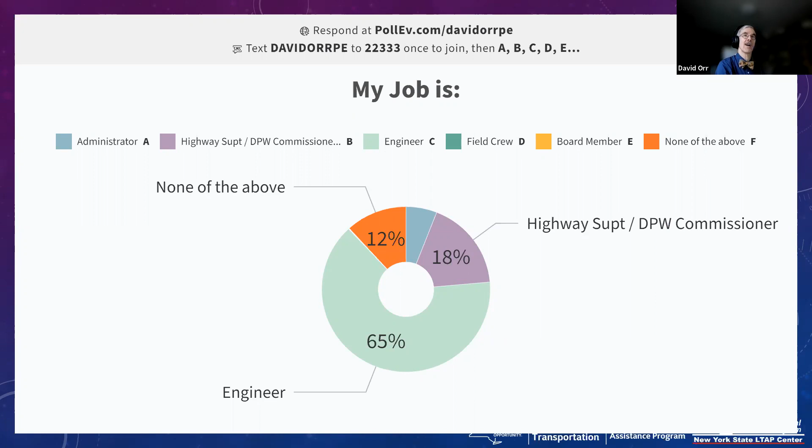Okay, so that's a good sense. We got folks from outside New York, we got all over New York State. And again, I invite your friends, get more of them involved, because this is a series we hope to really evolve, and we hope you have fun with it.

Now, these series of webinars—and we've been playing with the name, if you got a really good name, let us know—we've called them fundamental webinars. I sort of call them, in short phrase, why webinars. We're going to focus on why we do things.

But really, it's a series. We're going to cover over time all the different topics you need to manage, maintain, and engineer your highway system, whether it's a street system or a road system in a rural area—really whatever you've got.

Okay, now the rest of this year we've already got scheduled out—actually we have into the spring as well. You can just go on our website and search for it. And who, what, and why webinars, I see that—that's actually not a bad idea.

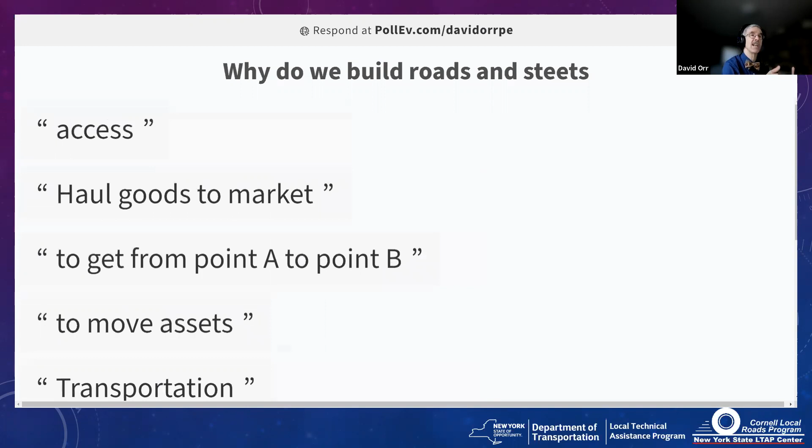Transportation, to move assets, okay, to get from point A to point B, and then haul goods to market. In fact, that's the first federal highway bill in 1916, was to get the farmer out of the mud, the farm to market roads, and the concept of getting our goods to market, because they would rot before you could get them to be sold and eaten by people.

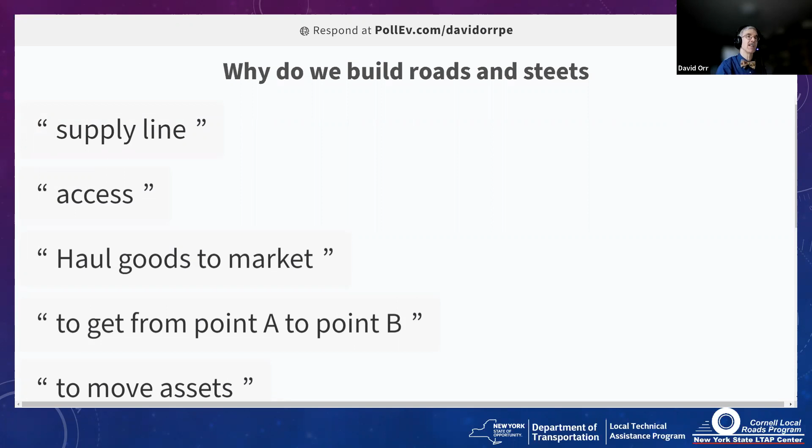So yeah, all good reasons why we build roads. But let's talk a little bit about why we build roads and the engineering and the science behind them, and see if that changes our answer a little bit. So what I'm going to do is talk about the three things that are the whys that came up when I was putting this together: traffic, the structure, why is there a structure, and the geometry.

And of course, it all really comes back to our families, and all of us live on a local road. We start from home, we go to work or school or some event, and we come back to home. And home is really the beginning and ending of most of our trips and our days.

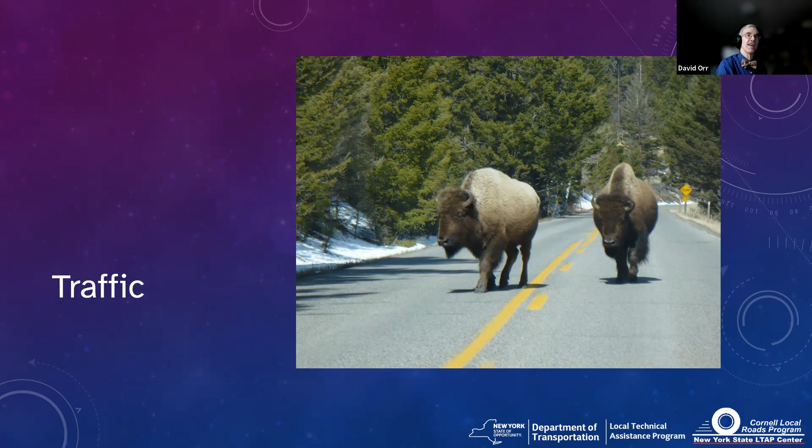So let's talk about traffic to start with. Now, this is in Yellowstone National Park. It's a little bit unique traffic, but we have to think about the traffic that's using our roadway. So again, in our poll, who uses your roads and streets? What kind of vehicles, or what would you describe? What one word would you use to describe the user of your roads and streets?

You've got commuters, yeah, people going from home to work. You've got bikers, you've got all those different people. You've got motorized traffic, okay. You've got trucks, okay, lots of citizens. Yeah, farmers. So far we got a pretty good list here, see if we get a couple more.

But if you think about it, that's really what we have to think about. The starting why is who's using the road. And the why then comes back to why we do what we do, which is to get them from point A to point B. Yeah, the military uses, especially some mainline roads might be needed. Electric vehicles down the roadway. I don't see any pedestrians, but think about it.

Pedestrians are probably on that list, right? Buses are probably on that list, both city buses or intercity buses, even though they go in rural areas, school buses, intra-city buses. So those are things you have to think about. Different kinds of trucks, small trucks, single axles, dual axles, semi-tractors. All kinds of different vehicles are using our roadways.

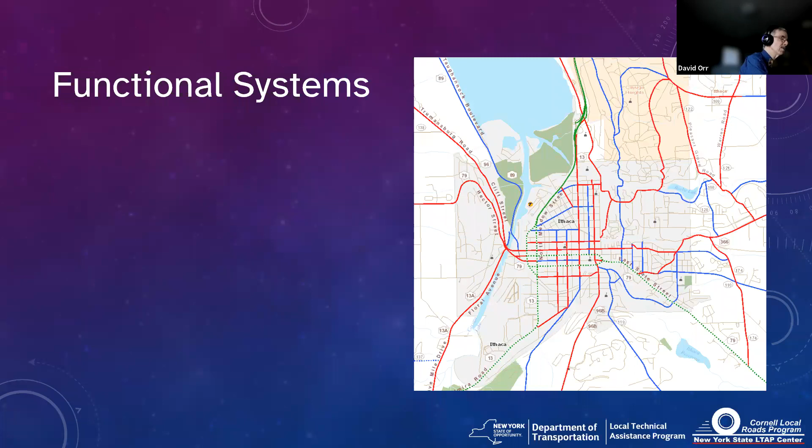The federal government has a list of functional systems. You can go on the web and search for functional classification, New York State DOT or NYSDOT, and you'll get a list of the different functional classifications defined by the government. The link is really long, so my advice is just search for functional, NYSDOT. Just search on the web for that.

It's much faster than trying to copy the link. If I come back over here to the web and type NYSDOT functional class, you can see Google suggests it, and right there, functional classification maps, New York State DOT pops right up. You can get a sense and look at the functional classification on your roadways, and there's actually an interactive viewer you can use.

That, in fact, is where this map comes from. You may want to do that for your own community and look, because there are times when you'll find roads that are mislabeled for whatever reason. It changes some federal dollars you can get—if it's an arterial roadway, for instance, you can get some extra dollars. However, you then have to meet higher levels of standards.

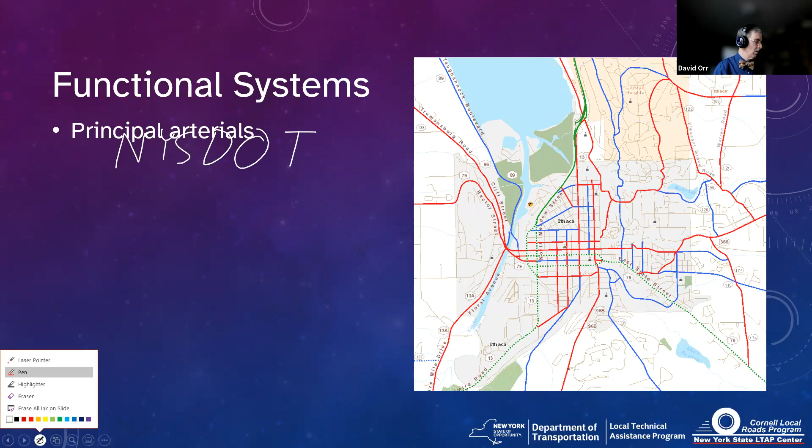We have arterials, the green ones on the line, maintained by the state. Route 13 going through the city of Ithaca is a principal arterial. Route 79 coming in from the east is a principal arterial. These are the national highway system, really important highways, typically maintained by the state, even within the city. We have other arterials, called minor by the federal government, but they're pretty darn important to a particular community—the main arteries of the system, hence the name.

Collectors collect the traffic and bring it to the arterials. In this particular case, the arterial system here is in red—sorry, my fault—the collectors are blue in this case. And then the local roads beyond that. They collect traffic, we could debate about that.

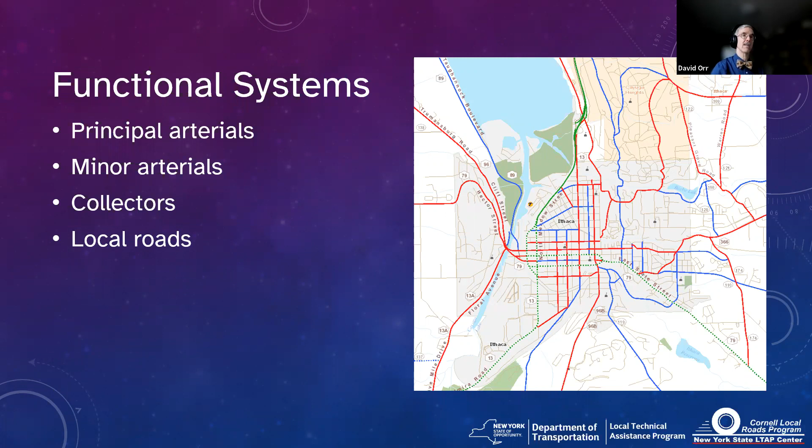The reality is one of the challenges we run into is if you live on a roadway, you treat it as a local road. If you know anything about Ithaca, there's a road down here on the bottom right, Pine Tree Road. It's the main road to get from a state highway over to Cornell University, but there's a whole bunch of houses on it. And so we always have that conflict—we can get a road that's both an arterial, a collector, or a collector and a local, or sometimes all three. So when we're thinking about why we build a roadway, we're thinking about that traffic, but sometimes there's a conflict that occurs.

Now, the American Association of State Highway and Transportation Officials, AASHTO, has actually got another designation you might want to look at for road standards, and that is very low volume roadways—these are roads under 400 vehicles per day. They're a little bit lower in terms of design standards, but it turns out they still meet the needs of the users. And again, why do we want to build a road bigger than it needs to be?

This actually comes from an idea developed here in New York State back during the Mario Cuomo administration, the idea of developing standards to meet the traveling needs and the needs of the people who live along that roadway. It's now a national standard for very low volume roads, but you've got to be under 400 vehicles a day.

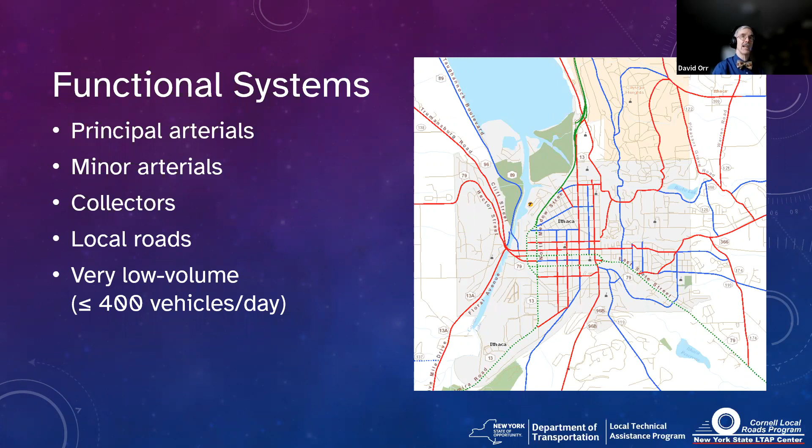So let's take a little side diversion and talk about how we might estimate traffic. Most of the time in these webinars we're talking about foundational concepts, but we'll throw out some nuts and bolts that might help you here and there. So let's estimate some traffic.

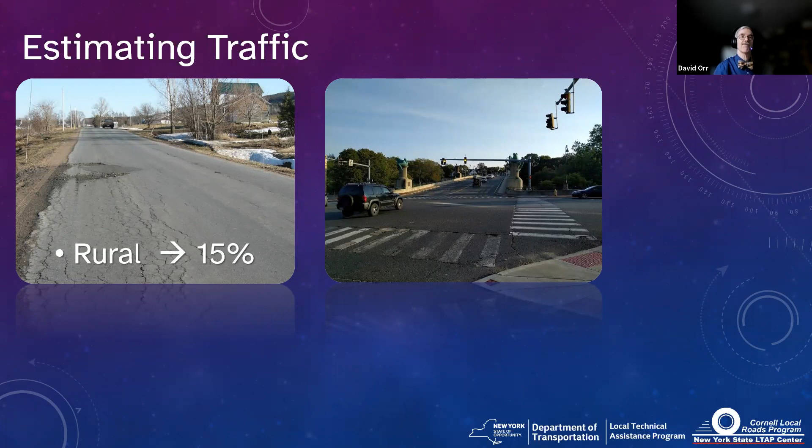Turns out that the busiest time of day, which most of you know, you can come in here and look at the busiest time. In a rural area, the busiest hour is about 15% of the traffic. In an urban area, like the city of Ithaca or city of Auburn, the busiest time is about 11% of the traffic.

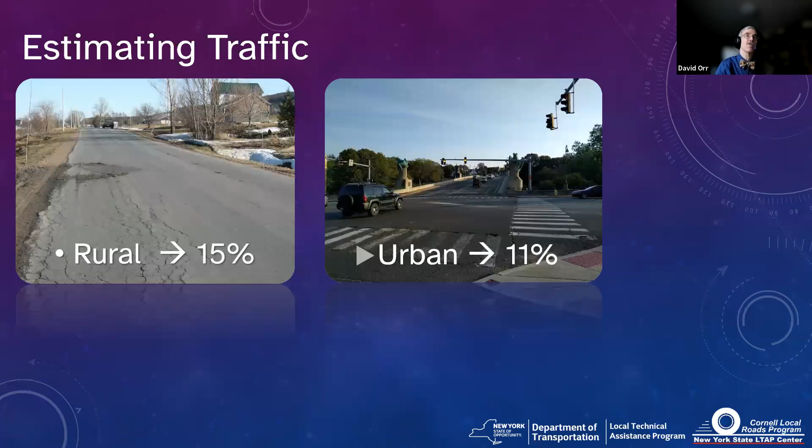It's not spread out evenly over the whole day, and this is because of what we talked about with traffic earlier with the commuters. So if I want to get a quick estimate of traffic, all I've got to do is know the busiest time, go out there, and count for 15 minutes.

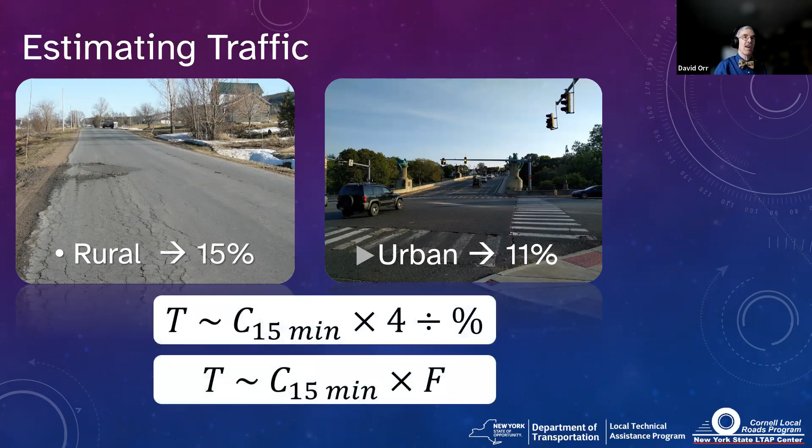Then I can calculate the traffic for the entire day by multiplying by 4 to get a 1-hour count, and then dividing by that percentage, either 15% or 11%, depending where I am. If I'm a suburban community, somewhere in the middle. You could also just use a multiplying factor — if you do the calculation, the factors are 27 for rural and 36 for urban. It's a pretty simple calculation.

Just to illustrate that, let's say I go out there in a rural area and I count exactly 15 vehicles in 15 minutes. So 15 vehicles in 15 minutes is 15 times 4, and that gives me 60. Then I divide that by 15%, and that equals 400.

It turns out that if you're in a rural area and you count about 1 vehicle a minute going by you during the morning rush or the afternoon when people are coming home, that's 400 vehicles per day. So there's your line where you can say it's a very low volume road and you might be able to use a little bit less stringent standard, which is sort of nice.

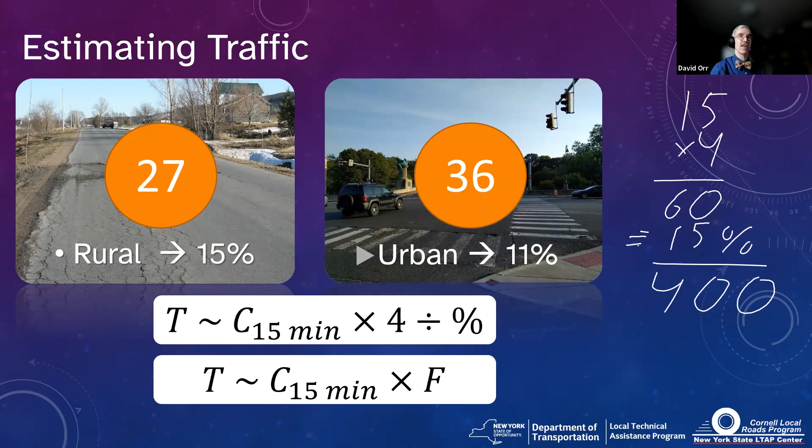And you can still use that same standard in an urban area — the calculations are just slightly different. So if you think about it from the standpoint of overall traffic, the principal arterial system is only 5 to 10% of our entire system — the interstates, the main state highways.

But it carries anywhere from 40 to 65% of the traffic volume, depending where you are, both in the state and within the country. On the other hand, the local road system only carries about 10 to 30% of the total volume, but it's 65 to 80% of the traffic length. Again, that's where most of us live, and we start and end our trips. So it's important to have the right standards to match the roadway needs and the traffic.

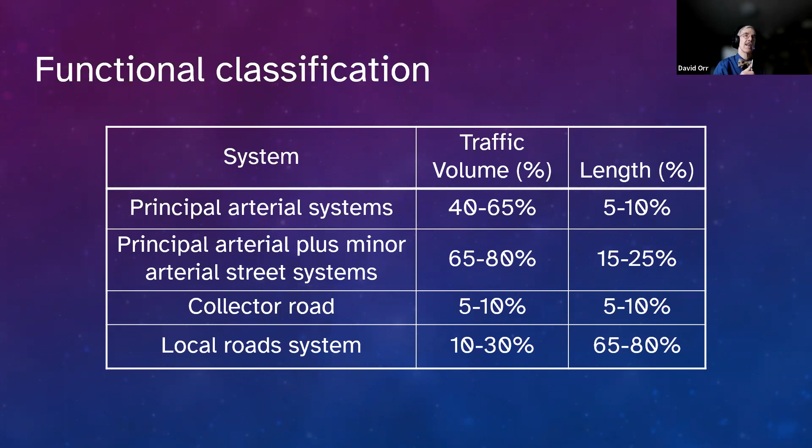Just to illustrate this, let's talk about goods transported by truck. I'm not going to put a poll up for this one, so just throw into either the chat or the Q&A your answer. What percentage of goods are transported by truck in the United States? That includes all goods, by the way, including gasoline, kerosene, things that might go by pipeline — so everything. You've got trains, trucks, pipelines, you've even got wires. Some people put those goods in there, but let's not worry about that. What do you think? What percentage?

We got 65, 6, 80 — all kinds of different answers. It turns out you can go on the web and search, you'll get a slight range, but it's amazingly consistent. Now, these are pre-COVID numbers; COVID may change that some, just so you know. But the range in the United States is between about 68 and 72%, depending on who you believe. I went with the Bureau of Transportation Statistics, and they use 69.1%. I'm just going to round that to 70%. So 70% of our goods get transported by truck at some point during their time.

So from a traffic standpoint, trucks are pretty important and one of the main reasons we build roads and streets. As an exercise, you may want to take your own community and look at it, and then think: what are my functional classifications? What are the important roadways? What are the arterials? What are the collectors? What are the locals?

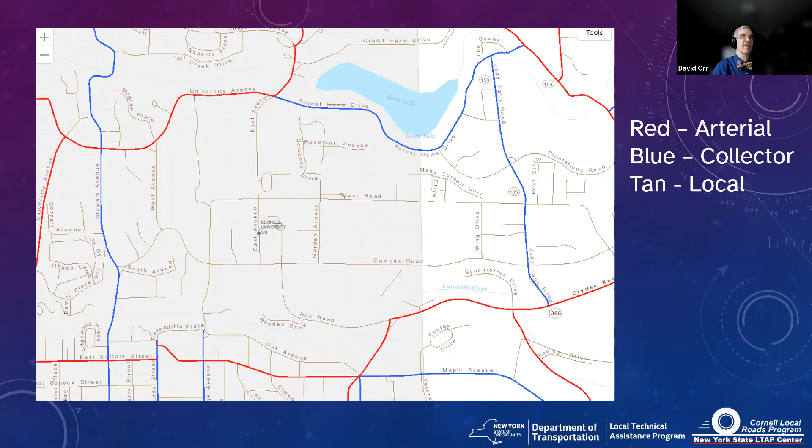So even within a local system, you may have roads that are more important. So keep that in mind as we think about the why. Now let's talk about structure. We know why we need to build roads to move things from point A to point B, but let's talk about the structure. Why do we build pavements?

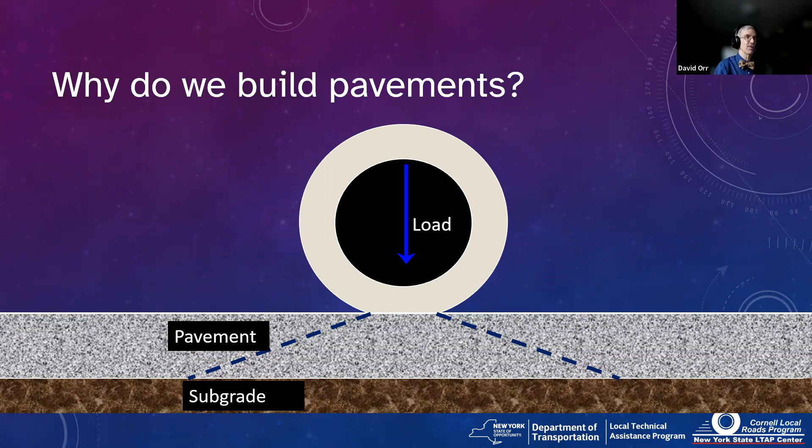Well, the original idea behind building pavements was we didn't want to overstress the native material, i.e. the subgrade. After we strip off all the organics, we're left with the subgrade material, which in New York State is probably glacial till. Some places we get sand, some places rock, but glacial till is our most common material. We don't want to overstress the subgrade. And that was the idea.

But turns out, as we've learned more and more, when it comes to the structure, what we really have to focus on is not overstressing the subgrade, but fatigue. Not exactly the same fatigue that we see with paper clips when you bend it back and forth because you're waiting on the phone, but similar to fatigue of a paper clip.

And to illustrate this, I'll show you part of a video. Let's get the arrow going here. And here comes our video. Watch the two green dots that exist here.

You can actually see the pavement move under the load of these trucks. Now, these are fully loaded trucks without drivers. This is early technology - they did lose a couple. They were testing a road to see if it would fail. It has poor drainage, as you can tell, very thin layers of asphalt. This was done by the U.S. Forest Service to see.

And what it turns out is we've learned all this: pavements don't fail like a paperclip due to stress. They fail due to strain, how much bending goes on. The more bending, the faster they fail. So when it comes to structure, we care a lot about the strain or the bending amount. So the why of a structure is to keep it from bending so much. This particular one only took 81 passes and this road completely failed. Wouldn't make for a good roadway.

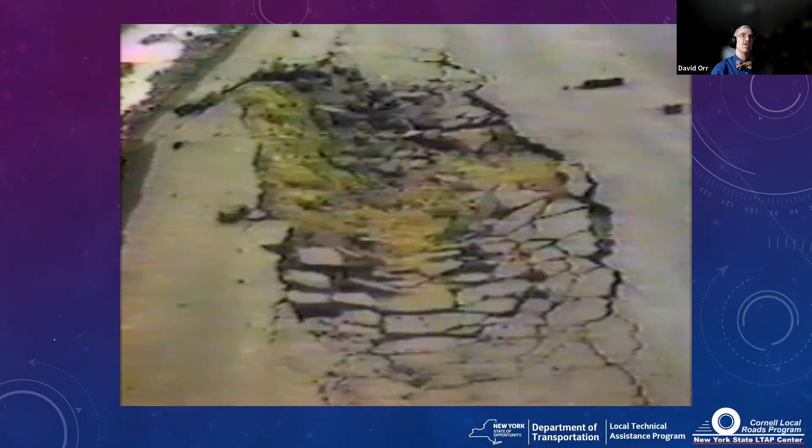Good research project, not good road. But it turns out strains are the things we care about. And the more bending, the faster the road's going to break down. So obviously in this particular case, we want to have good drainage because we don't want that water to get in the way. We don't want that water to create problems for us. And so that's an issue we need to think about.

So the locations of the critical strains - well, obviously there's a point right under the wheel that we care about. Let me get a color that we can see here. Let me get yellow. How about yellow? So we want to care right under the wheel. There can be strain due to that.

There's also a bending strain point here that might be near where the pavement bends under the load. There's also a point at the bottom of the asphalt where there's tension going on. It could be an issue for us. So that's something to be aware of.

We could have a point here on the top of the subgrade where there's strain, and that bending leads eventually to rutting. The point is, where the pavement bends is what we care about, and we want to reduce the amount of bending as much as possible. That's the goal here, as much as we can.

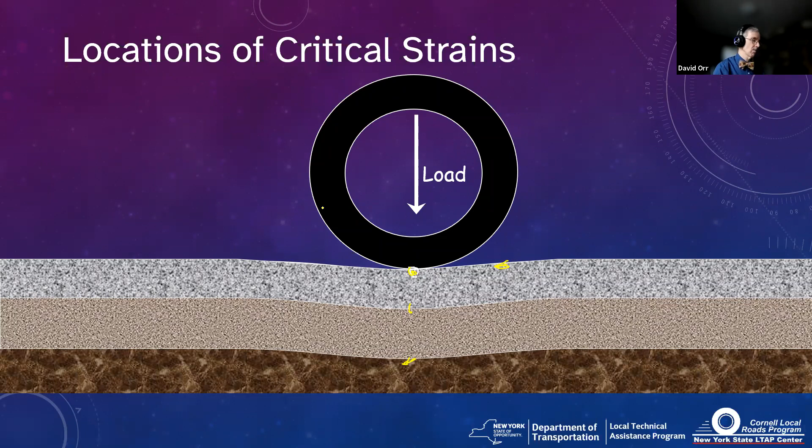Now, in terms of what that means to damage as we're building the structure of our roadway up, let's ask a simple question: the damage of trucks versus the damage of cars. How many passes by a car do you think it takes to do the same damage as one fully loaded 10-wheel dump truck? Throw that in the chat or the Q&A.

14? 1,000? Okay, somebody put in 200. Okay.

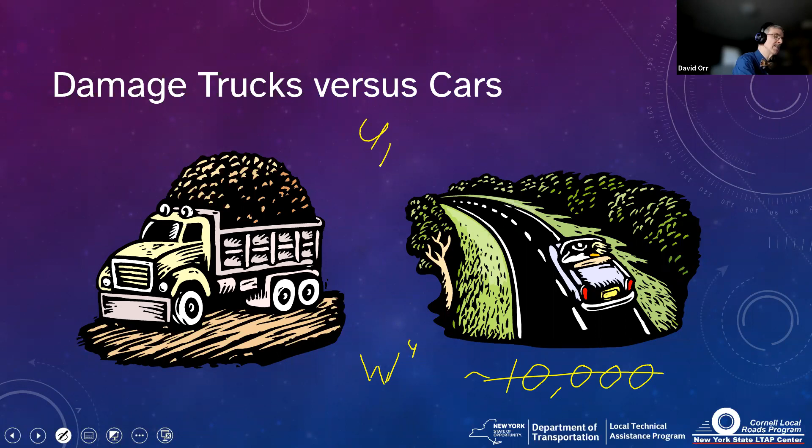300. So it turns out you can do the math, and the amount of damage done is related to the ratio of the weight—I'll use W for that ratio number—raised to the fourth power. It's not exactly 4, but close enough. So if the car weighs 3 tons and the truck weighs 30 tons, that ratio is 10, and 10 to the fourth power would be approximately 10,000. But that doesn't account for the fact that trucks have a lot more wheels, so 10,000 is the upper limit. Most people agree the ratio is somewhere between 4,000 and 6,000. So you need 4,000 to 6,000 cars going down the road to equal the damage of one truck.

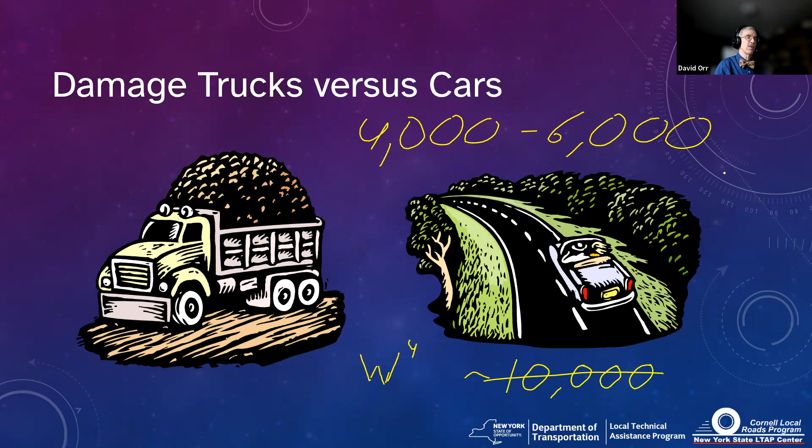So when it comes to structure and thickness, trucks rule. We design our roads to handle those heavy loads. And of course, that means we need to worry about seasonality, which is why we post some roads in the spring—because when it's thawing, there's more strain and faster failure. That's why we post it, to reduce damage on the roadway. So when you're managing your system, that's something you may want to think about.

Now, someone asked a question about posting. I know not everybody posts their roadways—we don't see it on the state highway system, but we certainly do it on the town system. You seasonally post roadways to reduce weights during the weakest time of year, the spring thaw period. In some parts of the country, they go the other direction: they allow extra weight in winter when the pavement is frozen, because it's actually stronger then. More importantly, it doesn't move as much—less strain, it lasts longer, less fatigue.

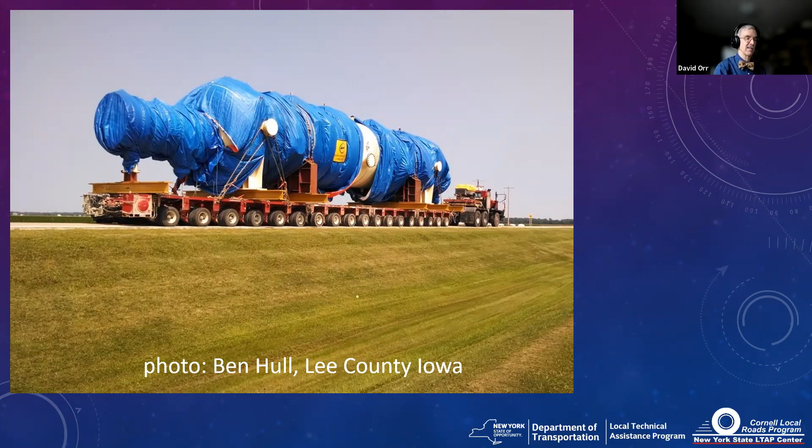Now, the surface material is a little bit of a different part of the equation. I just want you to keep that in mind—surface material is slightly different in terms of the equation we deal with. So keep that in mind as you're thinking things through.

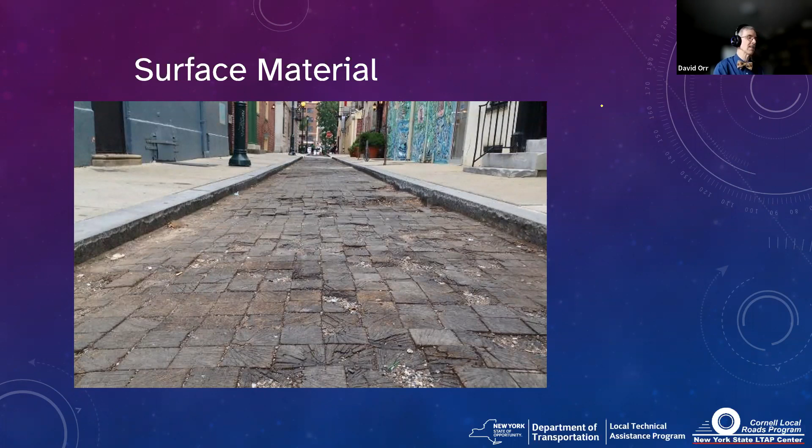The surface material is carrying the vehicle loads, yes, but more importantly, it's taking the abrasion from tires—high pressure tires, cars—so in this case, all traffic matters. Now, this is a wooden street in Philadelphia, if I remember correctly, and it's still maintained with wood. But what kind of material do you have on your road system? What surfaces do you have? I don't think anybody has wood that I know of—if you do, that'd be cool.

Asphalt is by far the most common in New York State—we have more asphalt surfaced roadways, sometimes called blacktop, than any other single surface. We sometimes use abbreviations like HMA. People use pavers—my driveway is pavers. You'll see cobblestone streets, gravel roadways, oil and stone. Some people have used cinders, which is still an unpaved surface. Concrete—those folks in Iowa have more concrete in their local system than any other single structure. So you can see all kinds of different surface materials.

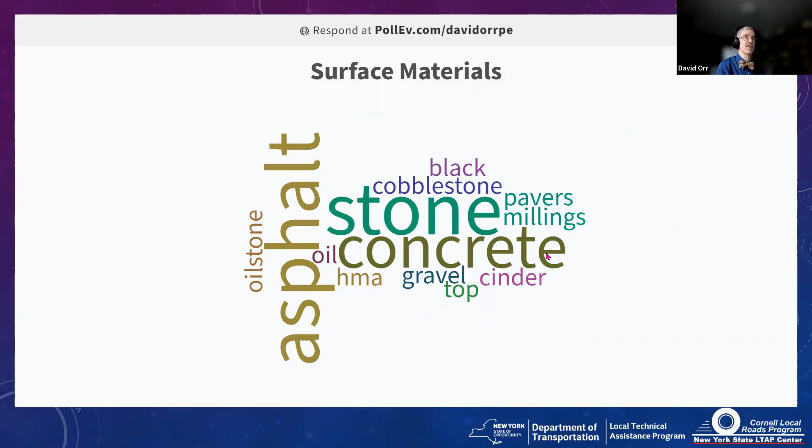Why do we choose these different surface materials? It's not really part of the structure—well, it is, but it's not the same failure mechanism. In this case, we're worried about abrasion, surface rutting. We want durability to hold up under traffic, and not polish and get smooth, which is why we have to be careful with limestone and things like that—otherwise the road becomes slippery and dangerous. The goal is a surface that can handle the traffic on it, have good friction characteristics, and good drainage characteristics.

Remember, this is the roof of our roadway, okay? And it needs to survive long term. One of the things that's really important is that the material underneath is the best possible material, because if it isn't, we're going to have ourselves problems.

So the surfacing material is certainly part of the equation. It's a very important part. Whether you have asphalt or concrete or brick or pavers—and by the way, most modern brick roads are really pavers, they're just red so they look like brick—it really matters they can handle that traffic.

And of course, at intersections, this becomes an issue, especially in urban areas, because vehicles, including cars, can lead to rutting if we're not careful, and shoving and pushing at the intersection. So we have to account for that. Again, think about the why we're doing something in terms of our surfacing material.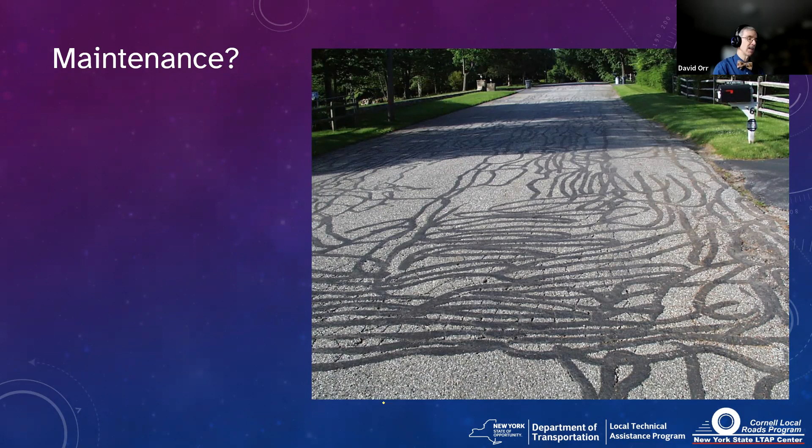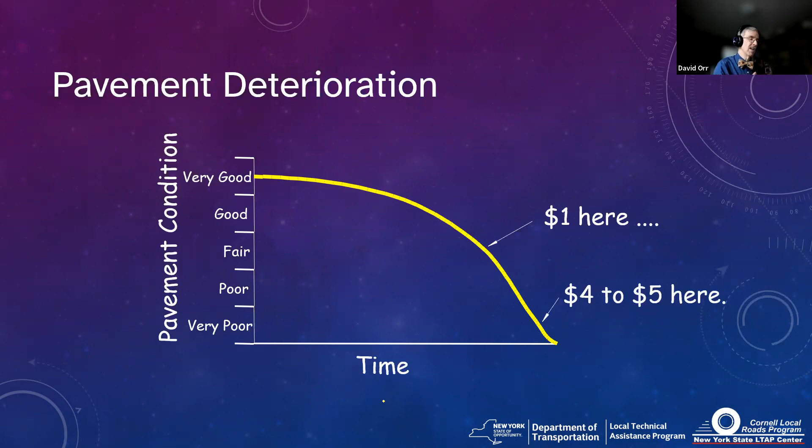Because if you look at pavement deterioration over time, roads start out in very good shape. Most roads are very good the day you build them. Over time, they slowly deteriorate. If you can do the maintenance while it's relatively cheap—maybe a proper crack repair even earlier, maybe even way up here—and then do a wearing course, a chip seal, a slurry seal, maybe over here, versus having to wait until you reconstruct it, your prices go up. It's cheaper to spend the dollar here to do that slurry seal than to wait down here and have to do an overlay or a rehab or maybe even a total reconstruction.

So it's good for the road, it's good for the public, and it's cheaper for you as a government agency. And it turns out smooth roads are cheaper for everybody because you get better gas mileage, less repairs. Heck, the cost to the user due to rough roads can be almost as much as we're spending maintaining those road systems. So the one thing we need to definitely do, because most of our system is old, is keep the maintenance up. And once we get the road in good shape, keep it in good shape.

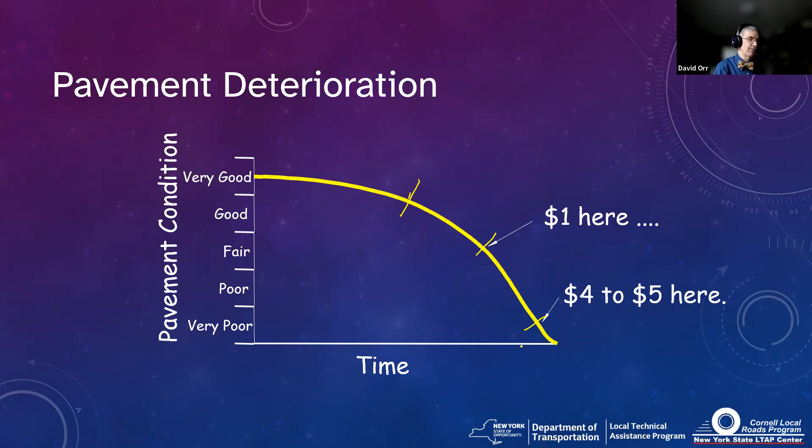Let's talk a little bit about geometry. There's a why behind all of the geometry. Sometimes it may not seem obvious, but even on a low volume gravel roadway, there is a why. So let's talk about that.

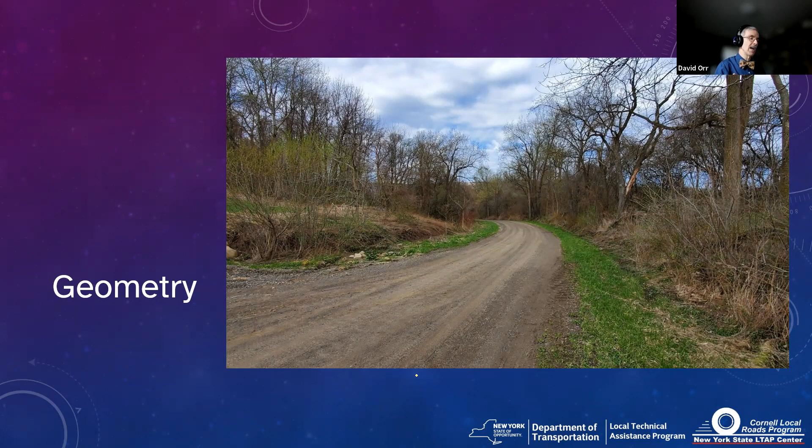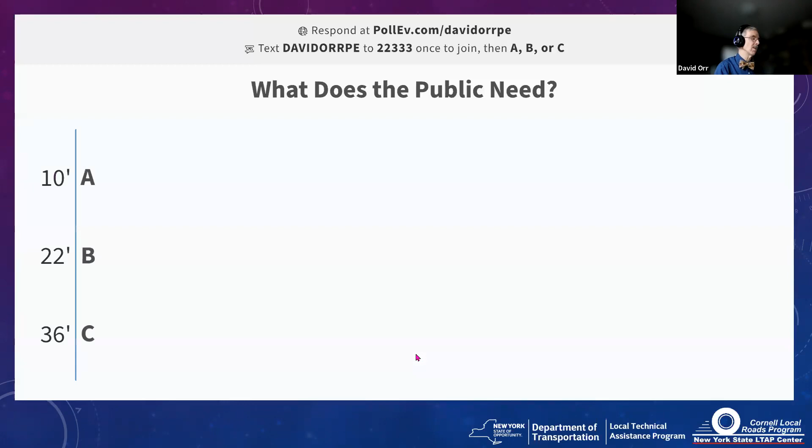We'll start with the width. So what does the public need? I'm going to give you three choices, and I'll assume in this particular case you can only pick one. If you can only pick one, are you going to go for a 10-foot wide roadway? Are you going to go for a 22-foot wide roadway, shoulder to shoulder? Or are you going to go with 36 feet? If I only let you choose one, which one are you going to vote for—A, B, or C? 10 feet, 22 feet, or 36 feet?

Now, based upon where you said you were from and looking at the list of signups, if you only could choose one, most of you I was going to assume is 22 feet. A couple of you who are with cities and villages are going to go wider because that's the key. We shouldn't have a single width. We really need to build the width of the road to handle the traffic that's on that roadway.

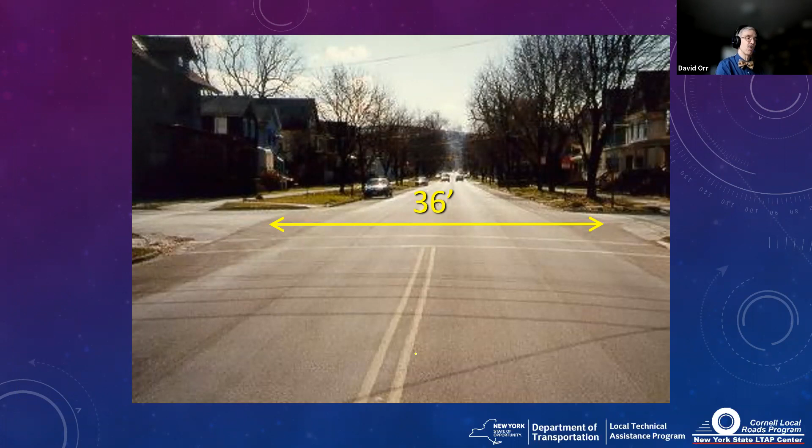If we go back and look at our pictures, this is in Ithaca. This is a roadway that's got parking on both sides. It's got buses, it's got vehicles coming in and out, school buses. You need the extra width, okay?

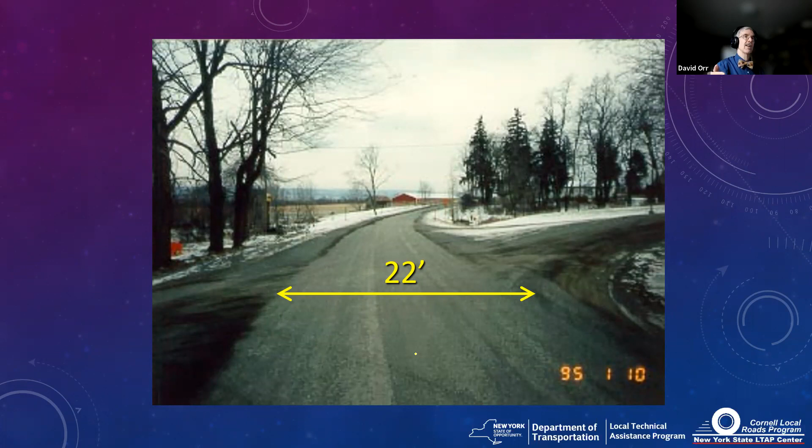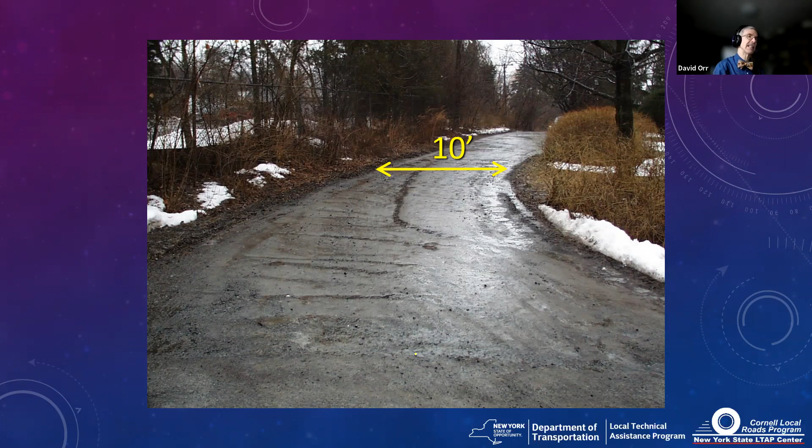But if you're in a rural area, you're not going to have parking on the road. 22 feet for a county road is probably fine, okay? But if you're in a residential area, you might even be able to get away with a 10-foot wide gravel road. In fact, this is my front lawn here on the right — it's a 10-foot wide gravel road. It's fine. It meets the needs of the public, and the road should meet the needs.

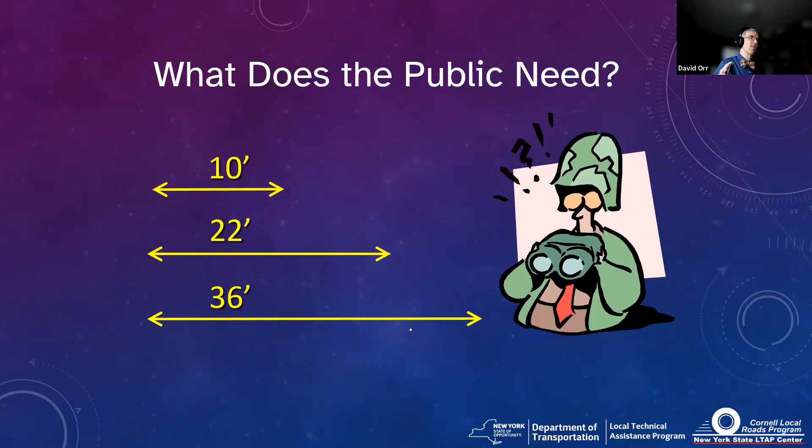So one answer is probably not the right answer — multiple choices. In terms of the right answer, you might need all of these in your particular community, especially in an urban area. You may be surprised at how often you actually need to have a larger range. And even in a rural area, don't just make every road exactly the same width. Look at the traffic that's using it.

Okay, now time for a second little side detour. Let's talk a little bit about stopping sight distance. This is used in a lot of the geometric calculations. It's probably the single most used calculation when setting up all of the criteria and why we do things.

And stopping sight distance really comes down to perception reaction distance and stopping distance. The perception reaction distance is the time that it takes for us to see something and react and put our foot on the pedal, okay?

That reaction time goes up as we are distracted. So in an urban area, it may actually take a little bit longer, okay? And then the stopping distance is based upon the vehicle, the type of vehicle, the quality of the tires, the surface conditions — are they nice and smooth because it's snow and ice, or do you have good friction because you've got a nice, good quality chip seal on top? So stopping distance is based upon friction factors and the vehicle. Perception reaction is the human part of the equation. And of course, anti-skid and all that can make a difference too.

But let's just talk a little bit about that perception reaction distance, more importantly, the perception reaction time. How long do you think it takes if you don't know something's going to happen for you to react? In other words, all of a sudden there's a deer. How long do you think it would take for you to actually go 'deer' and put your foot on the brake? So again, in the chat, how long, how much time in seconds do you think it takes for you to actually put your foot on the brake and start the stop?

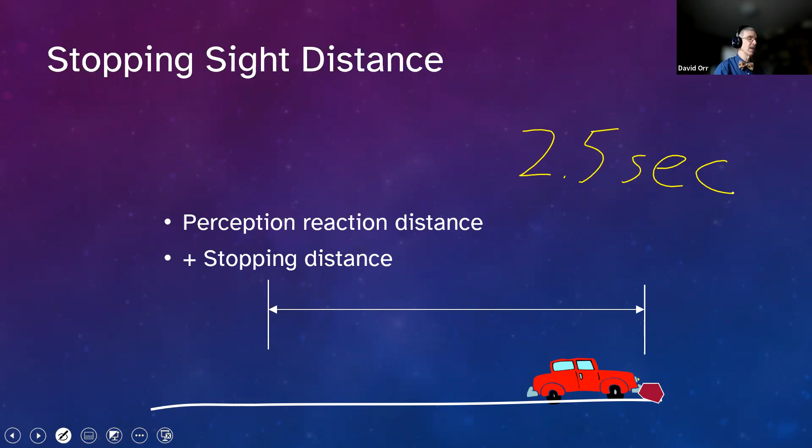The most recent design standards from AASHTO have come out, and they're listed in your handout, by the way — you can go get something called the Green Book that's in the handout. They've added something called decision sight distance. I like decision sight distance. I think it's a pretty good idea, and it accounts for the fact that in urban areas especially, and even in rural areas, we made it a little bit longer time. There's so many other things going on, so we increase the sight distance.

So normally in a low speed 30 mile an hour area, which is most of New York State urban area, we might only need a couple hundred feet to stop the vehicle.

We actually need probably almost 400 feet, almost double that, because if people are distracted, think about how much longer it takes since they're still traveling. And by the way, please put that cell phone down. That's going to add 5 seconds. Add 5 seconds to everything else. So if you're not paying attention, 5 seconds at 30 miles an hour, that's almost 45 feet per second. You get 5 of those, you've just traveled over 200 feet.

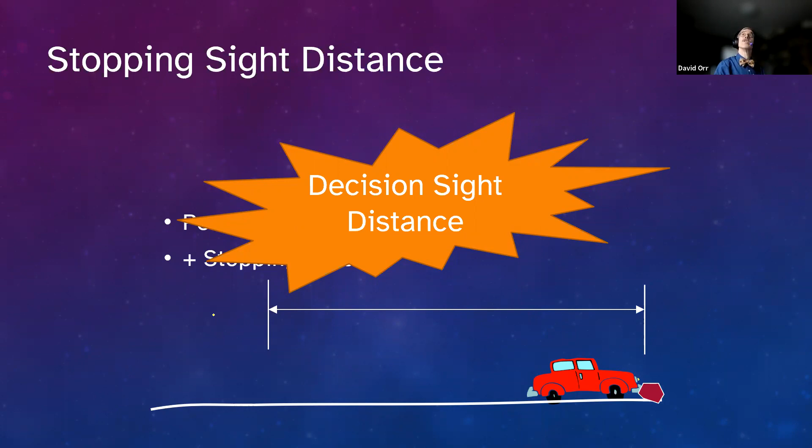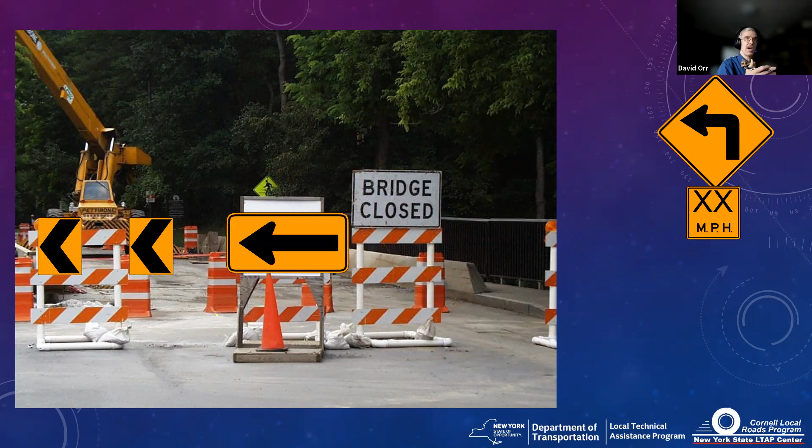So stopping sight distance, we use that a lot. Let's talk about how we use that and why we do what we do. Now, good signage can help. Signage like this is confusing and reaction times could actually go up. But good signage that tells people they've got to turn left and there's a sharp curve can actually improve reaction times. We typically use 2.5 seconds.

And of course, we super elevate roads to deal with that fact. The super elevation allows us to go a little bit faster around the corner while not taking up more space.

We have to think about intersections the same way. Think about the users on the roadway. What's the radius they're going around the corner? Do they cut into the other lane, and if they do, is it safe? As you're thinking about improving your own system, just think about vehicles. Why are they doing what they're doing? Can they see? Do they have sight distance? Can they make that turn and stay on the pavement? If they can't, you might need to make things wider.

When it comes to vertical alignment, that's driven by trucks, heavier vehicles. Trucks don't like going up steep hills. Neither do bicyclists, or in this case, buggies. If you think about it, cars and trucks are the equivalent of pedestrians and bicyclists. If you've ever watched pedestrians, they're going to go straight. If they get the opportunity, they'd go up a super steep hill—they don't want to make a detour. They're like a car: go straight. So vertical alignment for a car or a pedestrian is driven by whatever's direct.

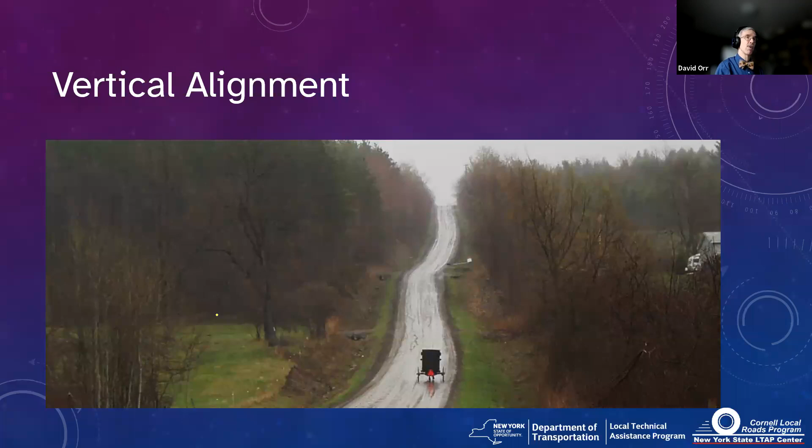Trucks and bicycles, on the other hand, don't mind going a little bit out of their way if they can keep the grade flat and keep up their speed. So when you think about vertical alignment, think about who's using the roadway, and if it gets too steep, can they really do it effectively, both going up and going down.

And of course, when you get a hard combination of horizontal and vertical curves, you have to account for that traffic. You may need to widen the inside of a corner to deal with the fact that trucks don't track exactly. You may need to deal with the sight distance over the top of a rise—can you see that stopping sight distance? And of course, if you've got a sag that's too sharp, it could actually be a safety issue, both at night from vehicle lights not seeing the other side, or even possibly bottoming out if it's really sharp.

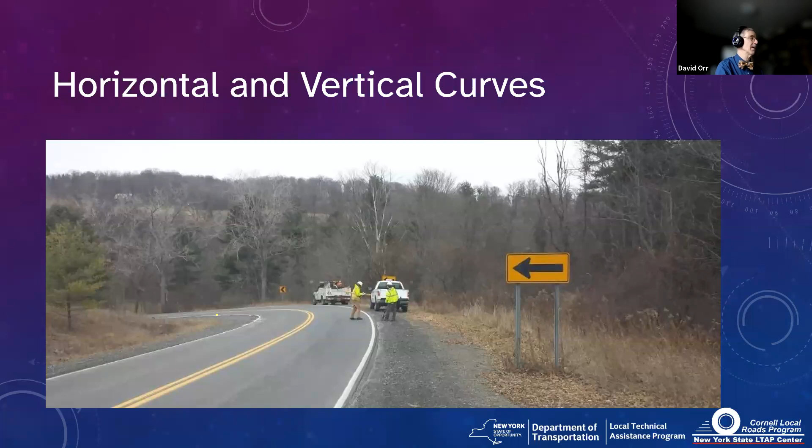And of course, there are clear zone issues you have to deal with. We won't talk about right of way today—that's a different webinar. But let me ask you: if your vehicle suddenly lost control and you had a choice to go left or right, which way would you go here? You're going to go left, or you're going to go right. You've got 2.5 seconds to decide.

Going to go left. We got a left. Everybody else is just hoping they don't hit anything. Got a left, and your brain says left. Yep, and I'm going to give you some bad news.

You want the distance from the roadway edge to hit nothing. How wide does that need to be? Depends on the volume of traffic, the type of roadway, but make sure that you don't surprise people. Don't break expectations.

Now, in terms of good geometric standards, we've given you a couple in the handout, but the AASHTO Green Book is the national standard. New York State has a highway design manual that pretty much mirrors the AASHTO Green Book. There is also the AASHTO low volume guide, a geometric design for low volume roads, which can be used for roads up to about 400 vehicles, though you still want to use the highway design manual for some features which may not be in the low volume guide. You could develop your own, but my advice is reference somebody else's.

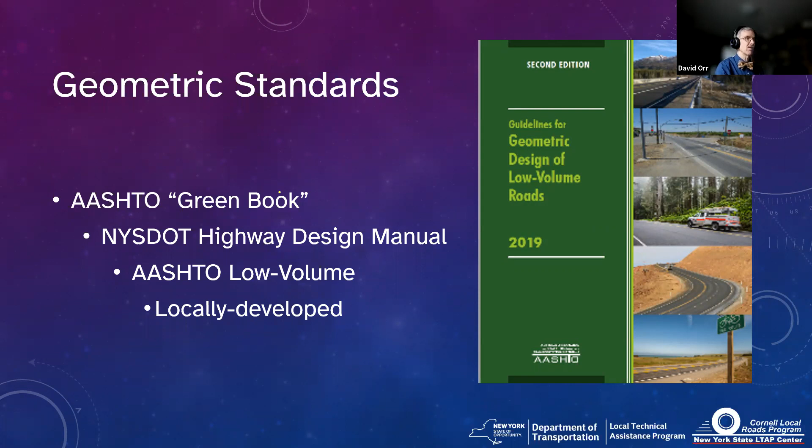So what I want to do, in our Local Roads and Streets Done Right workshop, we start off with the 10 commandments of a good road. Now this could be a good street, good lane, good sidewalk, good whatever. What I'd like you to do, help me out in the Q&A or the chat, I don't care which, is tell me why each of these is one of the 10 commandments of a good road. Tell me why we think these are important when it comes to a road.

Safety actually is part of it — you certainly don't want to drive in the water. What other important thing about drainage? It prevents problems underneath; your subgrade doesn't fail. It protects the subbase, so the pavement lasts longer and gets more durability.

Water is really, it's not our enemy — water is not a problem, we actually need water. But excess water is definitely our enemy because, as Doug said, it reduces strength. The more water, the more it moves, the more strain, the faster the roadway breaks down. So you need the right amount of water — get excess water away from the roadway, don't let it pond, don't let it sit. And of course, when it freezes, it could really be dangerous. This particular section of street, when it freezes, could be very dangerous. Okay, so yep, that's an easy one.

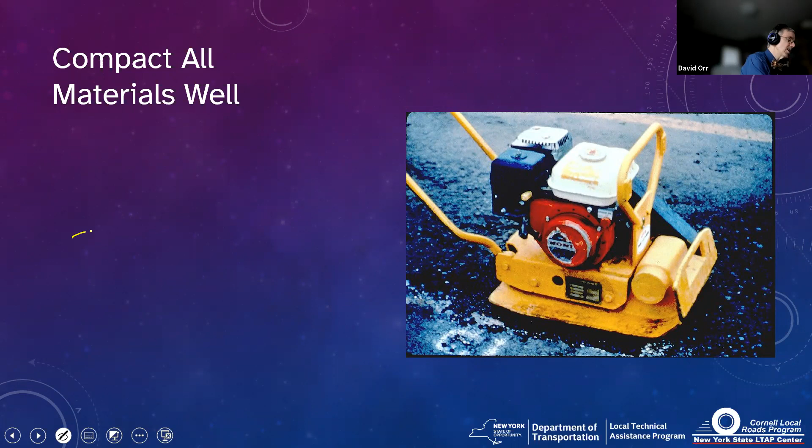If you think about it - we'll draw our roadway here, not my best lines - imagine I didn't compact it well and I got my tires on it. Well, guess what? It's going to settle, but it's going to settle underneath where my tires are. So I'm going to get rutting, I'm going to get movement. So you really want to compact things well. Spend the money on compaction.

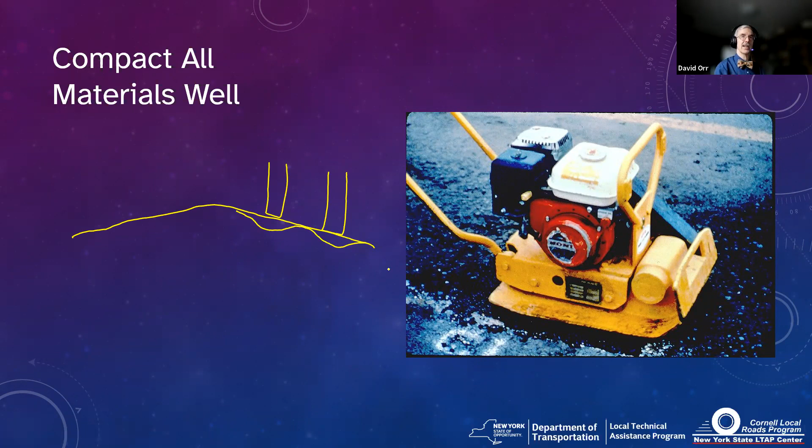Design for winter maintenance. Why is that one of our 10 commandments? This is basics of a road - we're talking about structure and traffic and alignment, but design for winter maintenance, why is that in our list?

A bit more of a challenging one, but it's actually pretty important in northern tier states to design for winter maintenance. You need a place to put the snow. You need to think about safety. It actually does reduce the cost of maintaining that roadway. Think about the drainage off to the edge - it improves safety. When you're thinking about alignment, you may want to think about where the snow is going to go when I throw it. When we put in roundabouts, dead end roadways in an urban area, where do you put the snow? How do you safely do so?

If you do it right, it drains properly and you don't get excess water when it all melts, because this is all going to melt at some point. So think about that as you're rebuilding or looking at a roadway. How do you design for winter maintenance?

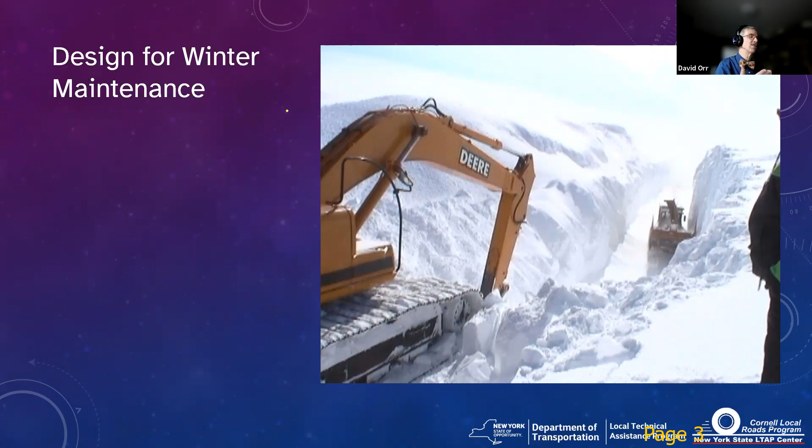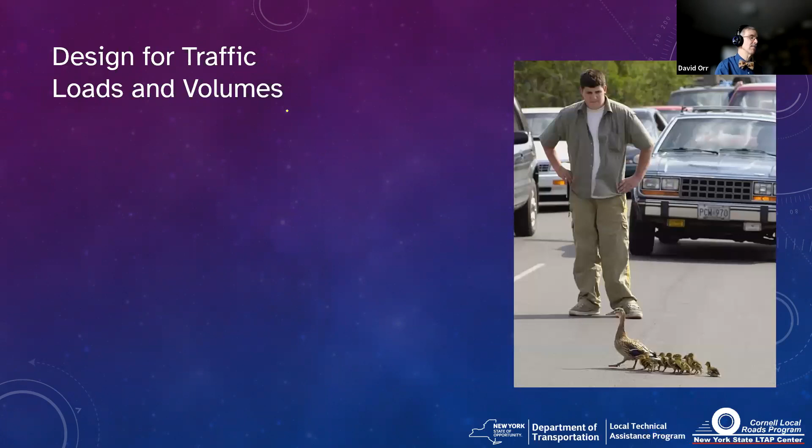Design for the traffic loads and the volumes on the roadway. Obviously that makes a huge difference. That could be very low traffic, low weight, but very important, or it could be something like you posted the roadway for, in this case, 8 tons in the spring.

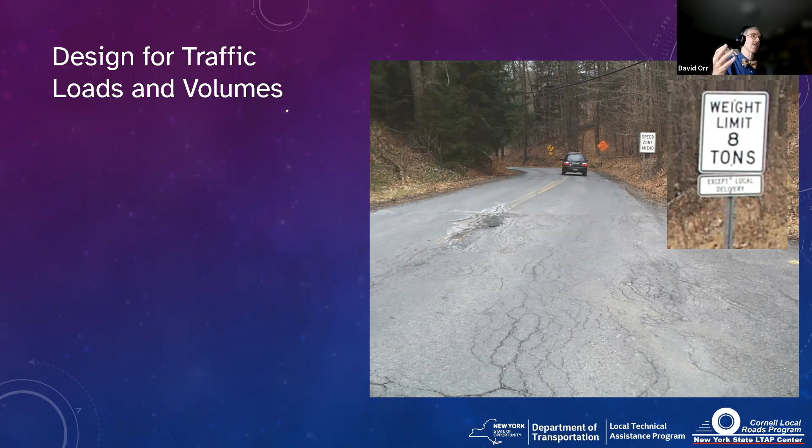Why is that on our list? Economics. If we design for the traffic loads and volumes, we can put more money in the more important roadways, the arterials, less in the local system, and spread our dollars out a little bit further. Maybe we live with a rougher road on a local road or residential street and a smoother mainline roadway. It's a balance, because it always comes back to economics. But also design the roads to handle the loads, because again, pay me now or pay me later.

Pave roads only when they are ready. That's one of our more important ones, and yet we see that one violated all the time. Why is this in our list? Why do we pave roads only when they are ready?

I think I've stumped them. You want to prevent quick failure. You don't want to have failure issues - it prevents rapid deterioration. And if you cover that problem up, it's going to come back to bite you when you least expect it.

This particular picture, the day after I took it, they put an overlay down. The road was not ready for that. So you've really poured money, pretty expensive money - it's $100 a ton for asphalt - and it's not going to last. That's a lot of money that you've wasted. So from a budgetary standpoint, only pave it when it's ready.

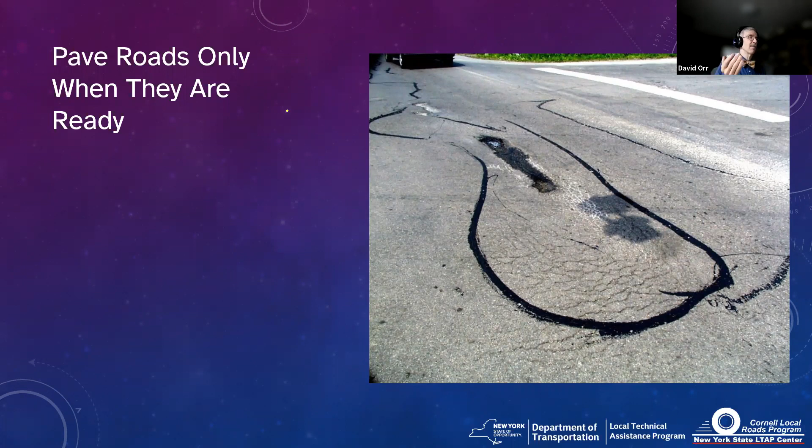And yes, sometimes we've all chip sealed in a snowstorm, but sometimes you have to make decisions like that. Don't say, oh, it's going to last anyway. Pave only when ready, even if you have to delay sometimes. You have to balance budgets and economics and all that.

Build from the bottom up. Now, this is not the same as building on a firm foundation. What do we mean by that, and why is it important to build from the bottom up?

And you can't build from the top down. So when you want the road to last as long as possible, put in a bigger base so that if it fails at the surface, I can fix the surface pretty easily. Mill and fill, things like that. Really hard to pick the roadway up, replace the base, and put it back down.

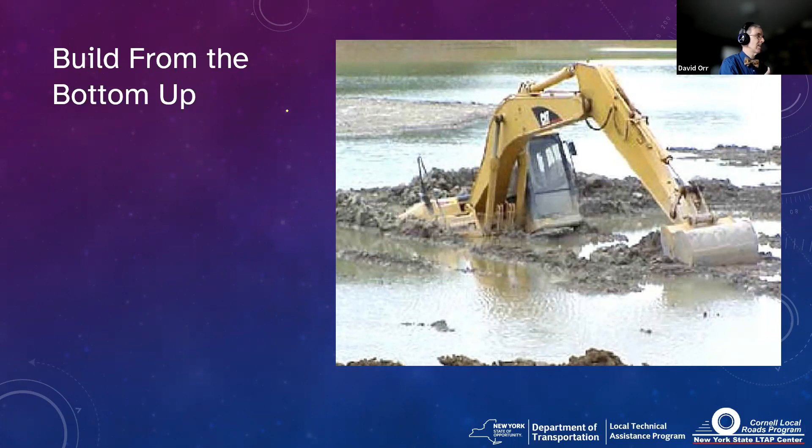So think about what is at the bottom. Spend your resources wisely. Absolutely. And then protect your investment. Really, this comes back to maintenance. We've got to do the maintenance more than anything else. Maintenance is key. Pay me now or pay me later.

And our final of our 10 commandments is keep good records. Some people go, why is that important from a building a roadway standpoint? Our phrase from our old director: how do you know what you don't know if you don't know you don't know it? You've got a roadway, you don't know how much strength it has to it, you don't know what's underneath, you don't have good records, you really have a hard time building the proper roadway, putting in the proper alignment, handling the traffic that's on it.

So 3 real quick questions to do our PDH friends to make everybody happy.

Track mistakes and good decisions. By the way, if you do a daily log, for anybody who does, if you see no issues, write that down. That actually can protect you in court later on. So it's a good habit to get in. Write down even the good things.

So let's do our 3 questions that make our PDH people happy, but also is a good reminder for you. What percentage of goods are transported by truck? 40, 50, 60, 70, or 80 percent?

Let's see what we got here. Got a person who said D. We got votes for D. Okay. Yep, pretty much everybody's gotten that one. That's pretty good. 70% correct. Very good.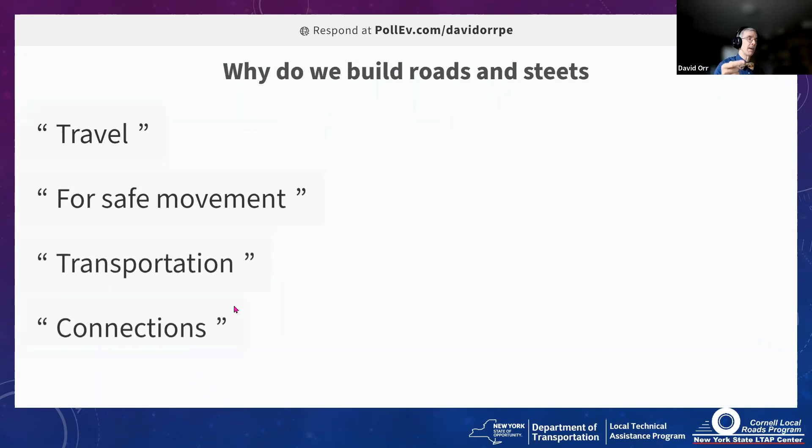So these are the ones we had before. Just think about it. Why do we build roadways? If you think about why we build roadways, you're going to have a better road system and everybody will be better off. And some of the things we talked about before are still true, but also we think about the traffic, the structure, and the alignment.